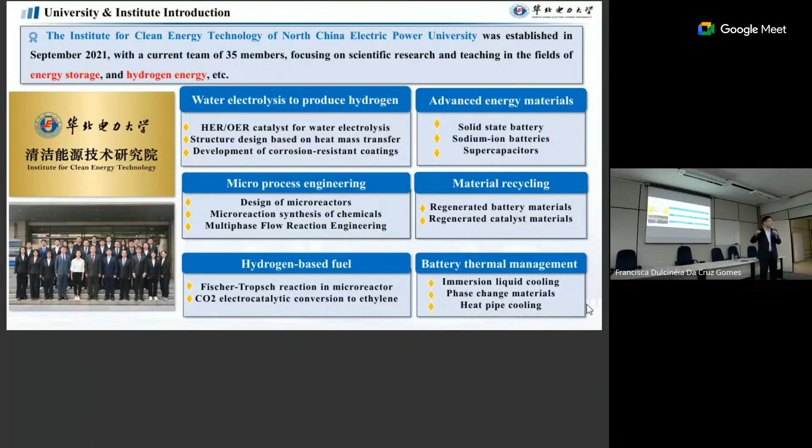And also for the last one - this development is still basic research - but for the whole managed thermal energy storage system, the most important thing is battery thermal management to keep it safe. So we developed some immersion cooling systems, phase change materials, heat pipe cooling to keep the temperature of the whole system stable. That's basically the research direction in my institute.

This is a group member in my group.

Let me make a brief introduction about myself, because I did my master's degree in France, University of Savoie. Then I worked at University of Lorraine in France, at the Institut National Polytechnique de Lorraine - the ENSIC engineering school for chemical engineering. When I finished there, I went to University of Gand and University of Rouen for a joint program for my PhD.

When I finished, I got a Marie Curie fellowship, and with this fellowship I went to University of Limerick in Ireland. I worked there a few months, then for the second part I came back to Karlsruhe Institute of Technology in Germany, where I stayed for one more year. After that I came back to INSA Toulouse, Institut National des Sciences Appliquées de Toulouse.

There I finished this Marie Curie fellowship. When I finished, I came back again to Karlsruhe Institute of Technology, where I stayed for a few years. In 2017, I came back to China and joined this university. I founded this institute in 2021, and last year, 2024, I founded a new department, called the Department of Energy Chemistry.

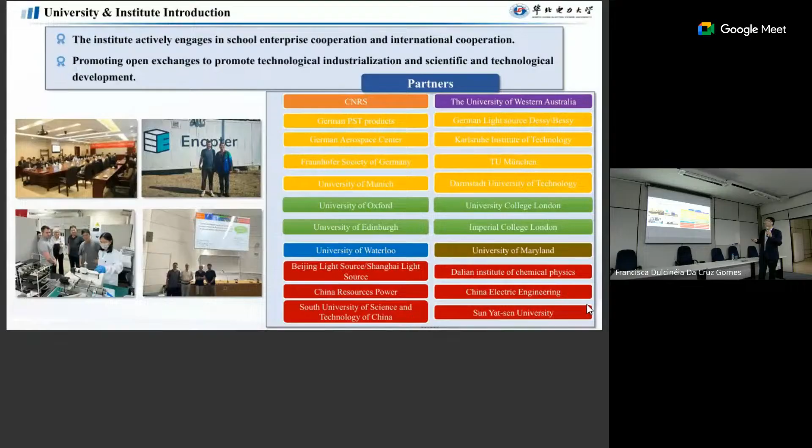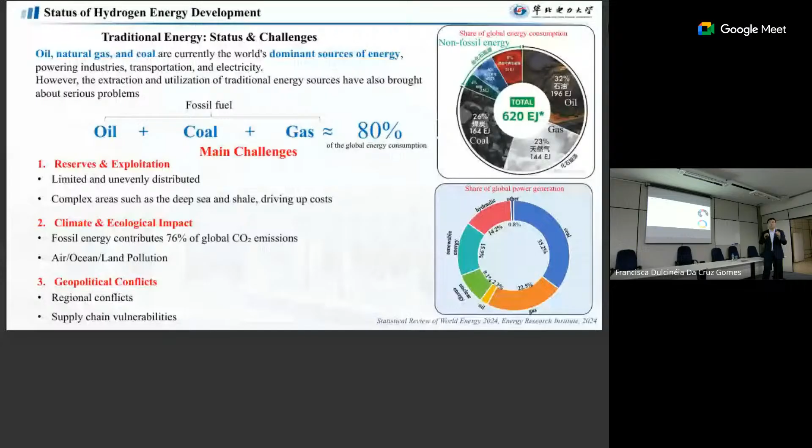So in China we have a lot of coal but are scarce in oil and gas. But for example, in 2023, if we check energy consumption in China, we see that non-fossil energy is only 16%.

You may read in the news that China has more installed power, but in reality a lot of that power is not being used. Because we installed this renewable energy power, but the grid doesn't like this kind of energy, so they don't use it. So in reality we have only 16% from non-fossil energy.

But of this, we have hydropower and also nuclear power. For PV and wind energy, we have about 4%. So it's a really small percentage.

Over the years, we believe wind energy and solar energy consumption in China will increase much more. For example, by September 2024, the total installed capacity is more than 1,000 gigawatts. The breakdown: hydropower 430, wind power 480, solar power 770.

But in China, we've almost used up our hydropower potential, we've finished developing it. So future development will be realized through these other sources.

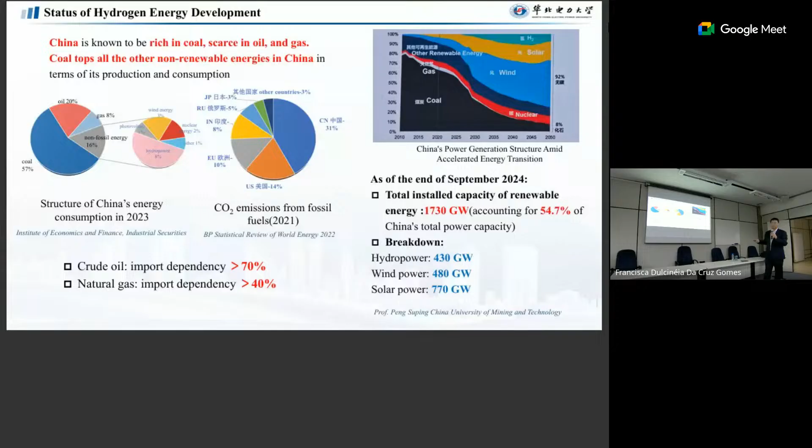Also, China has a commitment for climate change. We try to get peak carbon emission before 2030 and achieve carbon neutrality before 2060. Our president announced it before the world, so we have to finish it.

According to this report, 80% of the reduction in carbon emission will come from new energy in the energy transition, like PV systems and wind energy, and 20% will come from energy saving over existing processes.

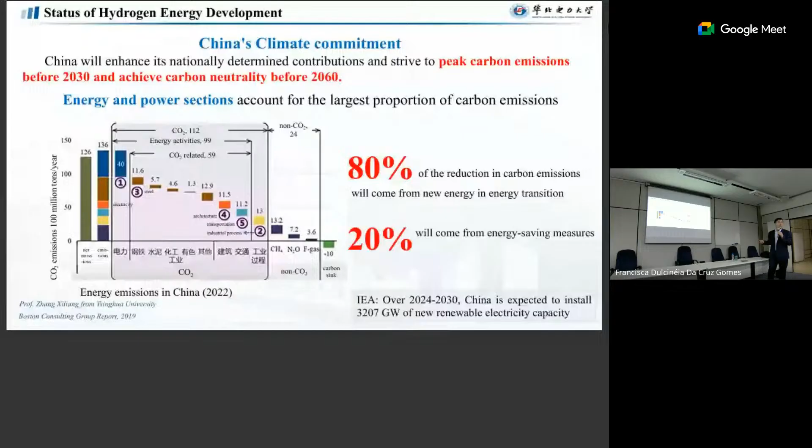Then we go to hydrogen energy, because hydrogen energy in China is now a very hot topic, with advantages like low carbon emission and high efficiency. Before, China also produced a lot of hydrogen, but it was mainly used as chemicals and raw materials, because we have heavy industry and chemical industry.

From now on, hydrogen as an energy carrier will become more important. So as an energy carrier, its percentage will increase, and as a raw material it will go down. That's the trend in China.

So hydrogen, why we use hydrogen in the electric power system, is because hydrogen is a good energy storage media. But we have different energy storage methods, for example batteries and compressed air. We have different sections in China. But why do we use hydrogen?

For example, when we compare to battery, at the moment in China most of our energy storage is with batteries. But why don't we use batteries? Because the energy density of battery is too low. For example, when we increase the capacity, we need to develop a lot of batteries. I think it's not a sustainable way for using battery for energy storage.

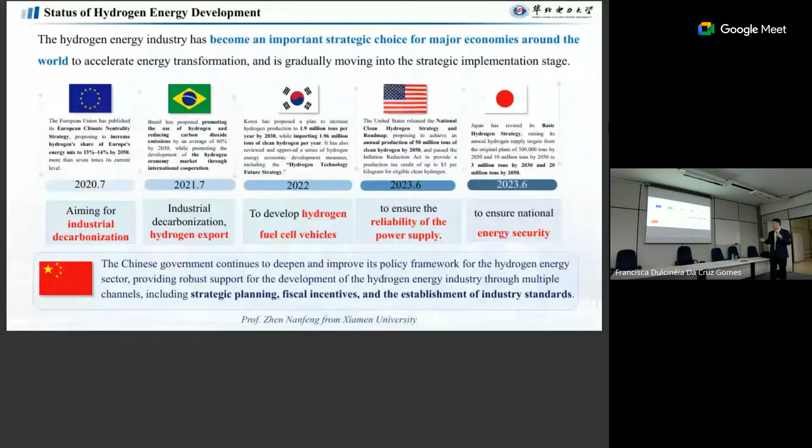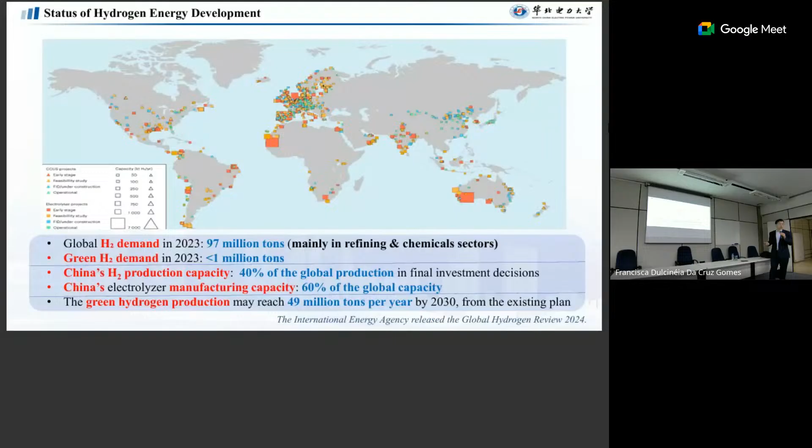Then we come to this hydrogen demand. For example, in 2023, the world had 97 million tons of hydrogen demand, but only less than 1 million tons by green hydrogen. China nowadays has hydrogen production capacity of 40% of global production, and for electrolyzer manufacturing capacity, we represent 60% of global capacity. That's really high. We can expect by 2030, green hydrogen production can reach 49 million tons per year.

According to the IEA report, global hydrogen demand will reach 520 million tons by 2050. If China accounts for 30%, that means 150 million tons. Among them, 109 million tons of hydrogen will be used for power generation. That means this will be a revolution for Chinese energy structures.

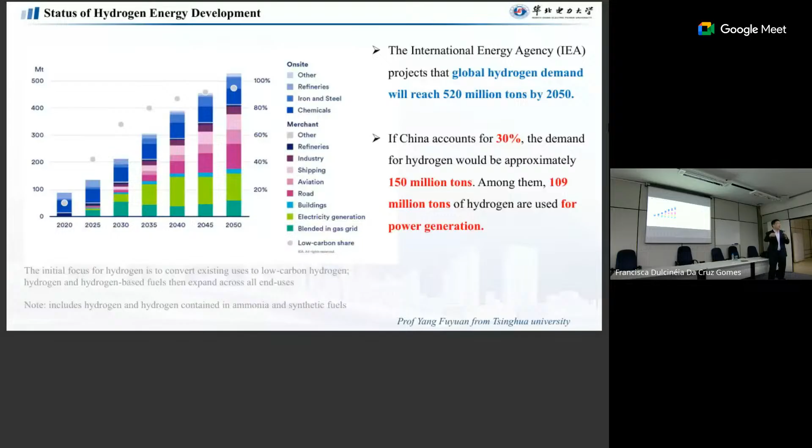For the complete hydrogen energy development, at the moment it's still in the initial stage and demonstration. For example, for production, we have water electrolysis for hydrogen production. We try to develop this in our institute, and I think also many universities in the world. We also have hydrogen production from fossil fuels and chemical raw materials, etc. At the moment, most of the production of hydrogen comes from fossil fuels, not from water electrolysis.

Then we have a storage and transportation problem. For example, nowadays we can store it as liquid hydrogen, but the problem is if you want to liquefy hydrogen, besides pressure you need to go to low temperature, which makes things more complicated. We can also use high pressure storage, which is very common in China at the moment, and also solid state storage and other methods. I didn't list transport here.

For me, most interesting is the utilization. For example, industry use as before, as raw materials for chemicals, and also for electricity generation. For electricity generation we have basically two parts: fuel cells, and combustion. We can combust only hydrogen, or put hydrogen inside something else. But here we also have a problem because hydrogen can create embrittlement of metals.

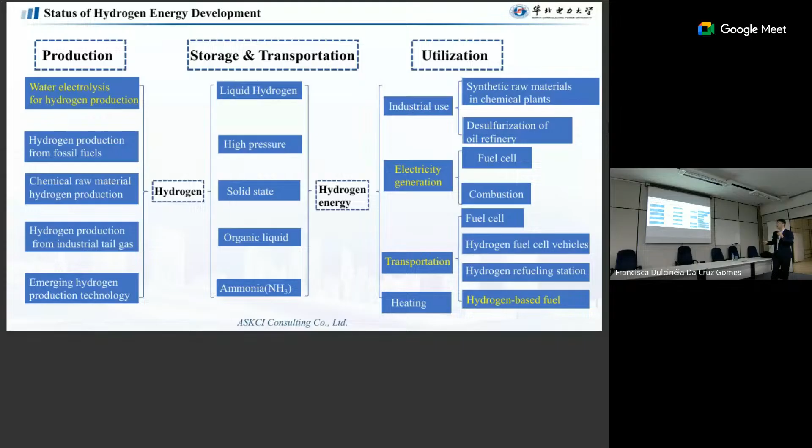In the whole world, the hydrogen energy industry is still in the initial and demonstration stage, not really industrialized. For example, at the moment, electrolysis of water only presents a small part; most comes from coal, natural gas, and byproducts. Coal-based hydrogen production, natural gas-based hydrogen production, and industrial byproducts represent 80%, 15%, or 5% respectively. That means from water electrolyzer, almost zero. The percentage is still too low.

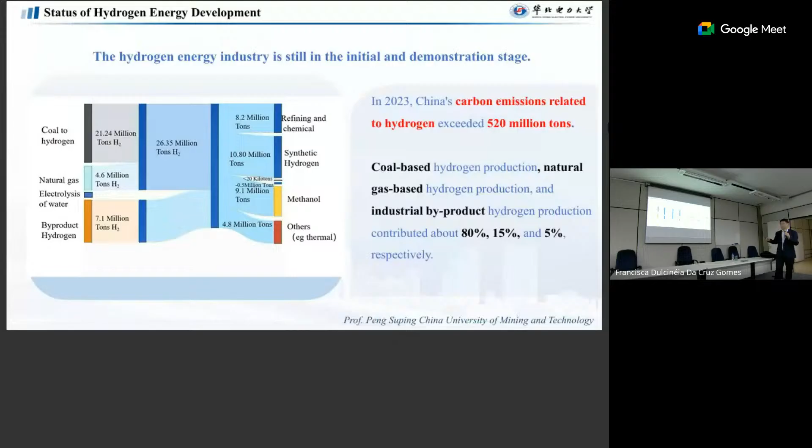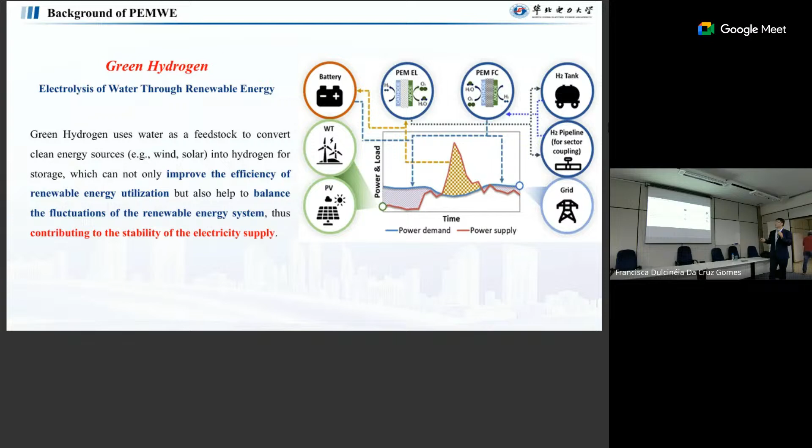For the next part, I will try to go to the water electrolyzer section. Green hydrogen means when we produce hydrogen from, for example, water electrolyzers, also from biomass. But in our group, we mostly use water electrolyzers.

For water electrolyzers, mainly at the moment we have 4 different kinds. The first one is alkaline. The alkaline system is the most mature technology at the moment. In my opinion, this technology is very good and also has a long history. I remember hearing that this technology was originally developed for submarines, because in the enclosed space of a submarine, they tried to produce oxygen for the humans. Then they used this technology nowadays for hydrogen production, and it also works very well. The cost is cheap because in the alkaline environment we can use cheap catalysts, and the temperature of 60 to 90 degrees is also okay. But we have a problem: electric load.

Electrical load is really limited. The reason is because in this system we use porous separators, so we have a diaphragm in the system, and this diaphragm is porous. Then we have a problem because we have hydrogen on this side, oxygen on this side. The hydrogen will try to diffuse through the pores to the oxygen part, and then we easily get the mix. That's why this technology cannot produce real high purity hydrogen because of these reasons.

Also, if we have a very good electric load, for example, with good electrocatalytic reactions for producing hydrogen and oxygen, if the speed is very fast, then the diffusion rate compared to the reaction rate is very slow. That means this diffusion rate is constant. For example, if you have a high rate of production of oxygen, you have a small amount of hydrogen getting inside, it is diluted, so it is very safe.

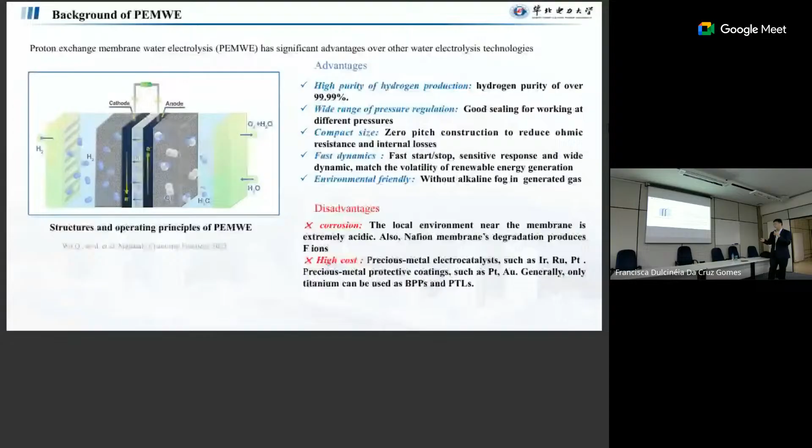The AEM, the problem is the durability, as I said just now. Efficiency-wise, basically because AEM is an alkaline environment, they can use cheaper catalysts. But in reality at the moment, they are not as cheap as we think.

Also, because this membrane's conduction - for example, as a proton exchange membrane, the conductivity is quite good - but for this membrane, the conductivity for OH is not as good as the proton exchange membrane. So here we have a higher ohmic resistance.

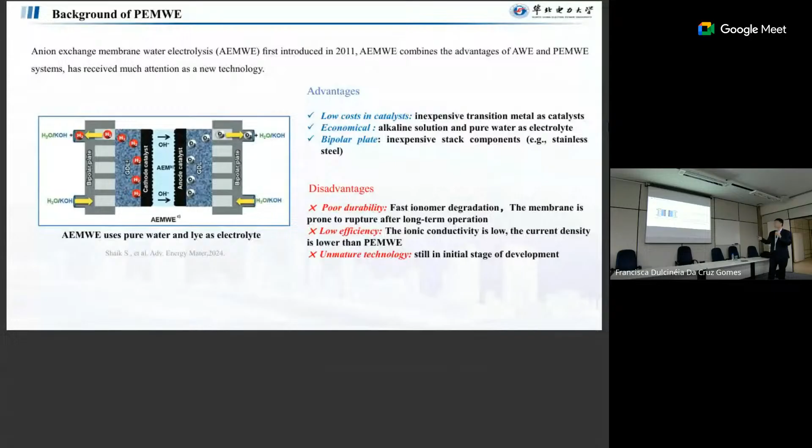But the structure, they are really similar. Okay, for SOEC, as I said, the only issue is high temperature and safety issues.

Then we go - my focus is on the PEM system. With the PEM system at the moment, I will try to go one by one. For example, first we talk about the catalyst.

For the catalyst, a lot of researchers in the world are developing it, but in the end, they found that at the moment the best is iridium for the anode side catalyst, for example for the oxygen OER reaction. And for HER, they use platinum with carbon materials. This is more or less considered standard today.

But how to develop this further? They try to get high activation, good durability, low cost. Based on this material, people are doing a lot of research.

For example, the first one is trying to develop this through size optimization. For example, we can reduce the size of the catalyst and get a better effect. That's something someone is working on.

And also, we try to develop structure design. For example, we can change the electrode structures, and also treat the surface wettability. We can find good results.

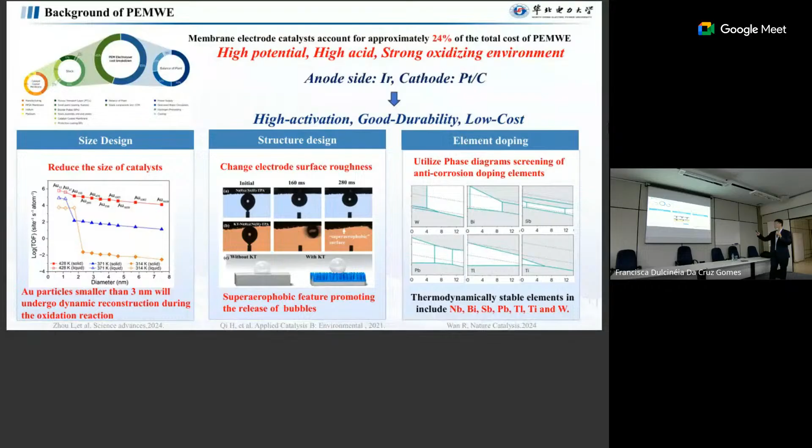And the last one is trying to make metal dopings - with other elements doping into the iridium. They get a good result and reduce the application amount of iridium needed.

The next part is the membrane. For the membrane, at the moment, people still use Nafion from DuPont. This Nafion has for a long time been regarded as the best membrane material for fuel cells, and nowadays we also use this for water electrolyzer systems.

I've checked a lot of publications. Most of the people working on Nafion is for fuel cells. For water electrolyzers, in recent years it's increasing, but still less than for fuel cells.

But for myself, I believe they have a difference. Even the same membrane, when used for fuel cells and for electrolyzers, they are very different. The reason is, for example, for fuel cells we have the oxygen phase and hydrogen phase to produce water.

And before running, we need to humidify the hydrogen to put the vapor phase into the hydrogen. That means the reaction is more in the gas phase.

We use a little bit of water vapor, but for the electrolyzers, we use liquid water. The whole system is a bit different because the liquid water is a continuous phase, and the bubbles are a dispersed phase. It's different. And because of this, we have what we call Schroeder's paradox.

Normally we believe when the relative humidity equals 1, we have the same swelling rate as liquid water. From thermodynamics, it's supposed to be the same. But in reality, we've done a lot of tests and they are quite different. For liquid water, we get a much higher swelling rate than RH equal to 100. People believe this may be due to the history of the thermodynamics, but anyway, they are very different. This makes the membrane's own swelling rate very different, so in the end we have a different behavior for this part.

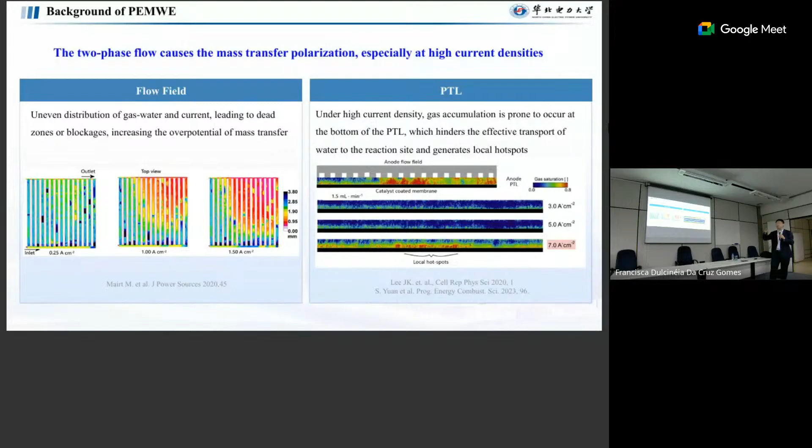For the catalyst layer, normally we have pore size about a few hundred nanometers to a few microns. But for the PTL, we have about 50 microns. For the channels, we have roughly 1 millimeter - in total about 1 millimeter high. So inside, we have different sizes of transport. It's very difficult to meet all the requirements for the structures.

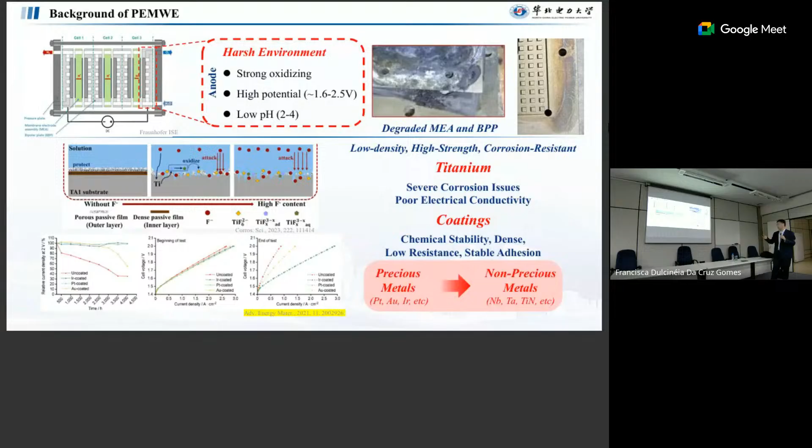The second thing is to use cheaper coatings, because normally at the moment people use platinum, gold, iridium, and we try to replace them with niobium, tantalum, and titanium nitride, for example. So that's another method to reduce the cost.

Because even the PTL itself, you cannot identify if it's good for mass transport or not, since it needs to work together with the channel system. When they're compatible, then it's good.

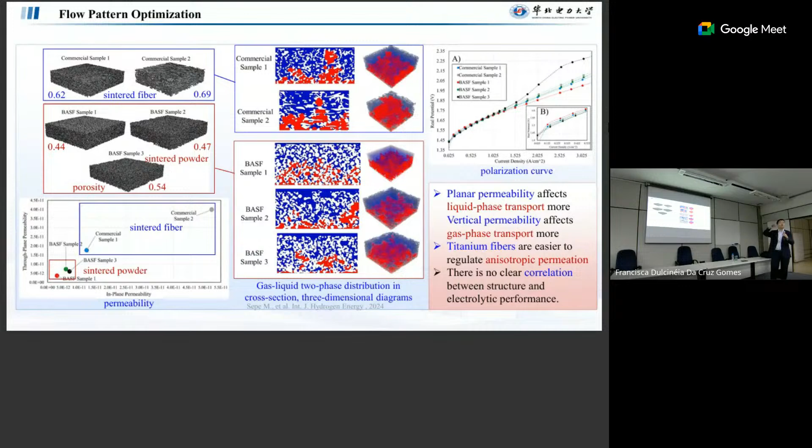The good thing here is when we use this fiber system, we can tune finally the in-plane transport and the through-plane transport by ourselves. That's also a good concept from the paper.

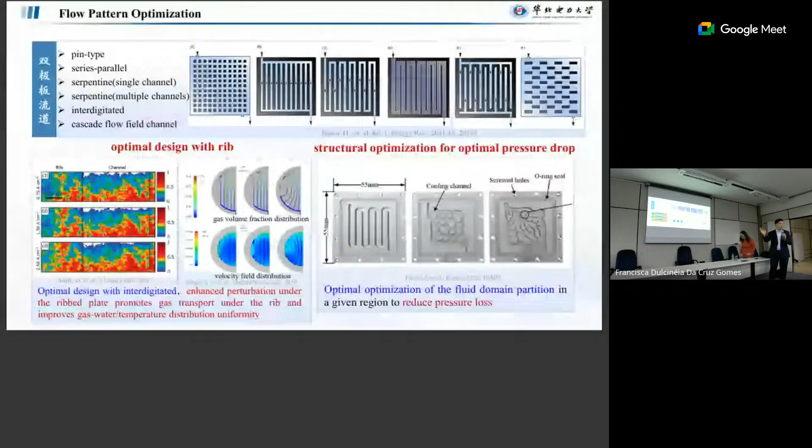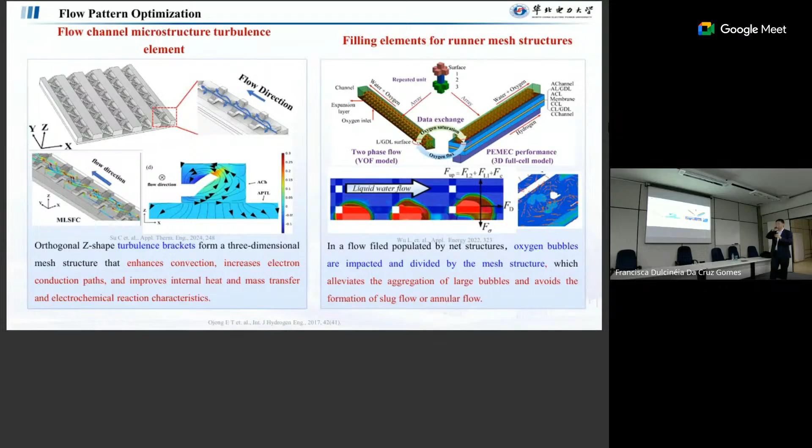Yeah, also we have some good results here, I'll go through faster. In this paper, they put some elements to try to guide the bubble, how to go out. In this system, they try to separate the bubble to avoid forming a slug flow.

And the last work here, in my opinion, they did very good work. This is from the Fraunhofer Institute in Germany. People always think about how to develop channels, but in the end they did one test: this one with channels, the other one with no channels, only different layers. In this system, they have no channels.

But in the end, they found very good results. For example, for the bubble resistance or the overpotential, this one is not as good as the other, but for the rest they are all similar. For the bubble resistance, if we have over 3 amperes per square centimeter, you have an evident difference, but at low current it doesn't matter. That means if we want to reduce the cost, we don't need the channels—we just put different layers and the plate, and it works for low current density. I think this work is brilliant.

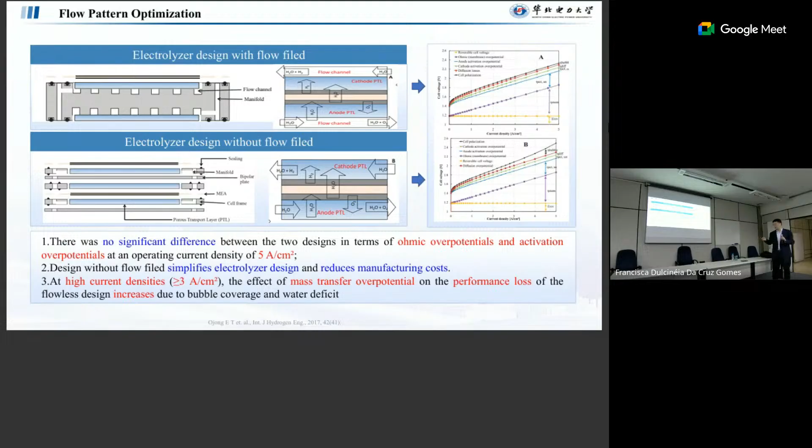Yes, this is something we developed in our group. Yeah, I'll go fast here.

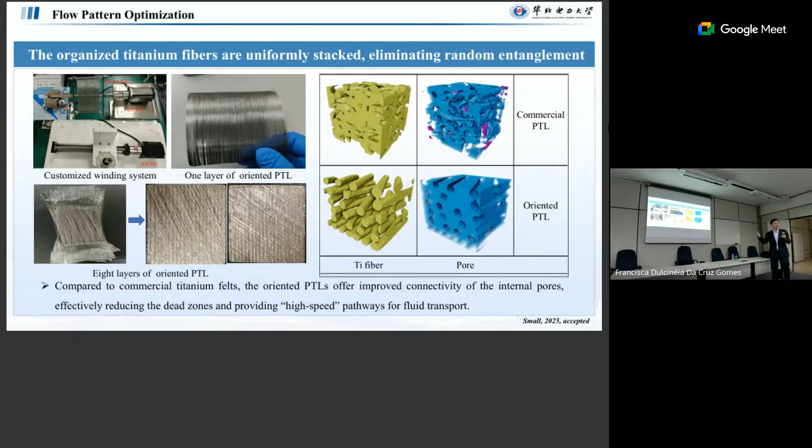Here's another one, we try to develop the PTL with a multi-angle design. For example, this is the commercialized system—here you have a lot of dead zones, the water cannot get in or out, and they trap oxygen inside. Here we have this structured design, and we get very good results in the end, because the water and oxygen can go up and all the way out without a bottleneck. That's why we get a good result.

Yeah, I'll go then. The last topic is about the coating. We try to replace the gold and platinum with niobium, tantalum, and titanium nitride. I'll go fast here. First we developed this HEA system—a high entropy alloy system.

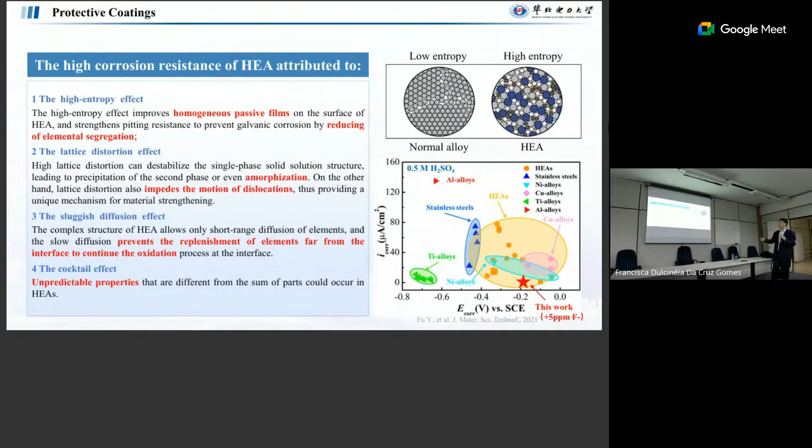With our work, we can get a good potential range at low current density, using a technique called magnetron sputtering. In our lab, we have a lab-scale test for smaller samples, and also with our collaboration companies we have a pilot-scale test—we've already industrialized this. In the CAS in Shenzhen, our collaborators have very big chambers, almost one meter wide, for this sputtering system to cover the surface.

Yes, there are some results, I'll go fast. In the end we have a good effect—a high entropy effect that dominates the formation of an amorphous structure, and these amorphous structures can resist corrosion.

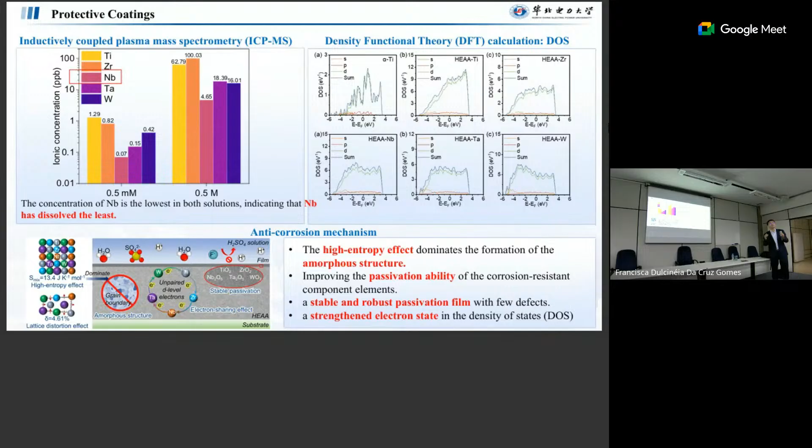Another one we developed is electrophoretic deposition, the EPD technology. This is not a new technology, people have used it for a long time, but the problem is the coating produced by this technique is normally not stable on the surface. We optimized this technique and got very stable coating layers on the surface. Here we use ITO—normally indium is also an expensive metal, but the good thing is we take this ITO from PV panels, which is waste for us, and we reuse that waste in the system.

Because we use this system, we can do it in the beaker for lab scale. But in the end, for industrialized applications, we can use a big container. That means we don't have problems over the space. We can make big structures, anything, no problem.

For example, for PTL, we have inner structures. If we use sputtering, it's difficult to cover the inner surface. But if we use this technology, we can cover the inner surface, no problem. So that's the second technology we did, and we got good results.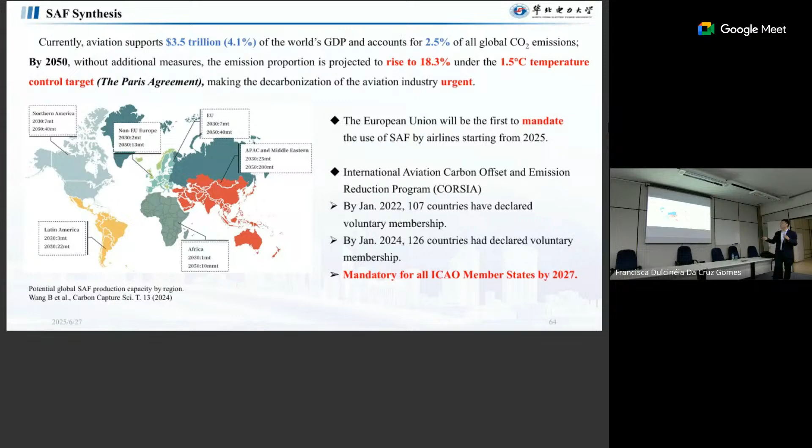Because for this SAF system, normally people produce it with FT, Fischer-Tropsch reactions, but this is a highly exothermic reaction. That means normally people working on the system need to dilute the catalyst, otherwise we will have too much heat. This can damage the catalyst and also the system. That's why we try to reduce the kinetics.

But if we use microreactors, we have the possibility of avoiding these diluters. So we have really high kinetics and also very good temperature control for the system. That's what we are working on.

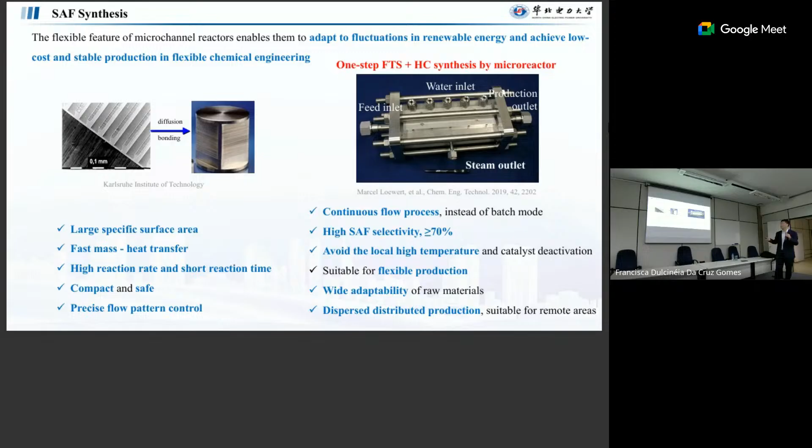This system was developed at Karlsruhe Institute of Technology, and this institute was the first in the world to invent these microreactors. Dr. Sun worked at the institute, almost the same time as me. At the moment, he's also working in my group.

The last slide is coming from the Shuangya SAF project. They produce 100,000 tons of SAF per year. At the moment, I think this is the largest in China, maybe the largest in the world, using this FT process. Last year they just started, and this is funded by the China Power Engineering Consulting Group.

Part-time, I also work in this group. We have a research center over here. So now we try to build some systems for this big project.

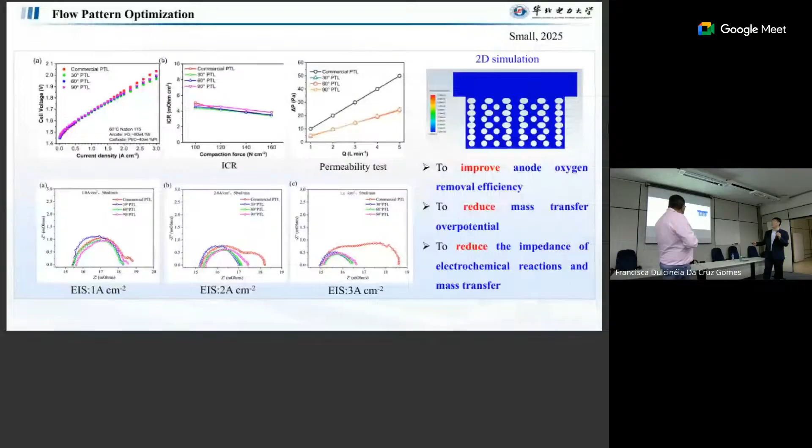By 2060, it can reach 10 yuan per kilo. I believe maybe not exactly this value, but I'm sure it will be reduced. We can see from the beginning, electric cars in China were also very expensive, so the government had to pay allowance for people who couldn't afford the cars. But nowadays it's market behavior. I think over the years this cost will be reduced. And now he has an electric car here. That's very good, a good choice.

Professor, can you talk about the challenges of using resources like water, because it's a limited resource? Can you tell us about the limit, the water reserves, the amount of water needed to produce hydrogen?

That's a very good question. At the moment, I think we didn't have much time to consider the water, because for us the most important thing is how to use renewable energy, we don't abandon wind energy and everything. But this is a real issue. That's why in China we have some researchers working on electrolysis of seawater. We take it directly from the sea. We already have some demonstrations in China, and I think in future it will work. If we use fresh water, that's true, we have the limitation. But if we use water from the sea, it's not a problem at all.

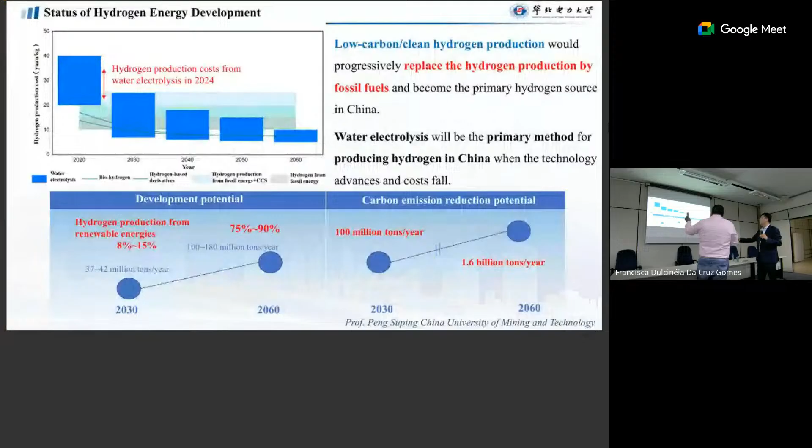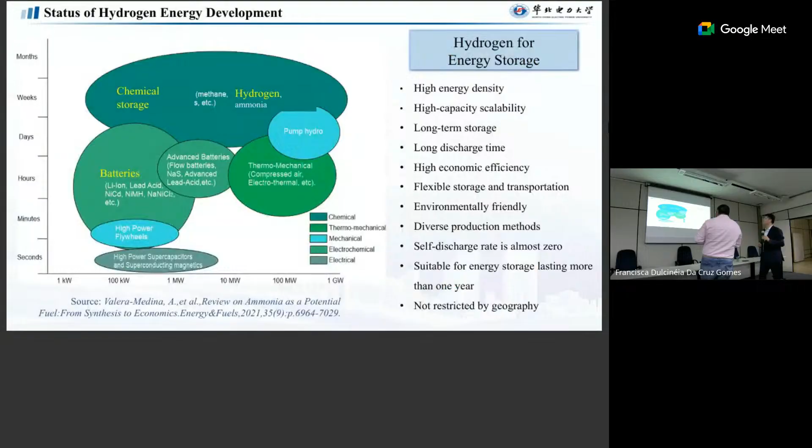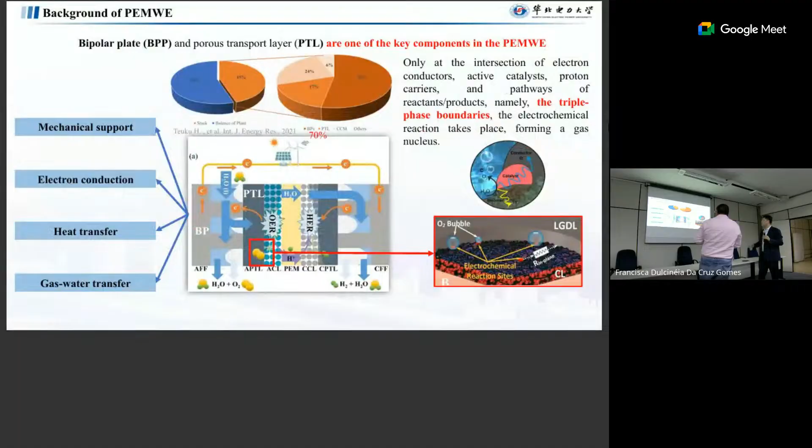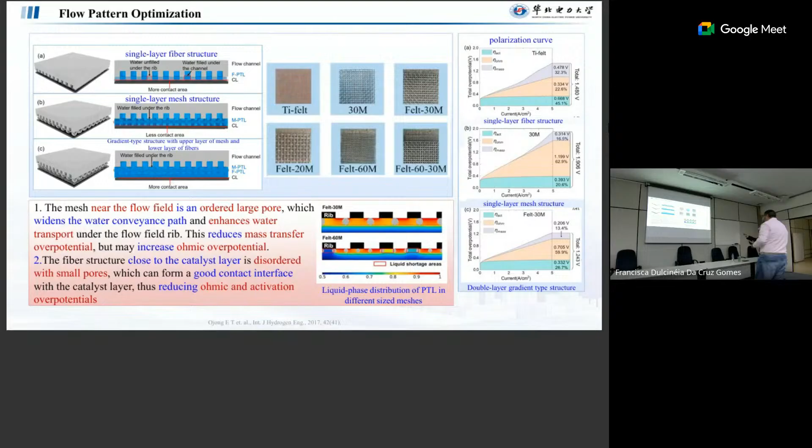Could you show the slides? Which one? The one with lab research, then the prototype, and then industrial. Where is it, to the end? The last one? No, I don't know, I think the end. Yeah, the end, three prototypes. Prototype, okay, yeah, prototype, it was for the coating I think. This one? Yeah, okay, this is the secret.

I think they have three steps: the basic research, then the pilot scale, then the industrial scale. And about your question on fundamental research and applied science - in my group I work on both, basic research and applied technology, because if I only work on the basics, industry will not pay me for anything. So that's why I work on both. In my group the students are also divided into two parts: some work on fundamental research for papers, some work for industry to get more funding.

Professor, there is one question from the online audience about turquoise hydrogen from pyrolysis of methane. He wants to know if you have information about this, if China is also researching and developing this type of technology, from biomethane.

Yes, at the moment we also produce hydrogen by reforming methane. In China it's also a big industry, but the problem for us is that it's not from bio, because in China biomass is not as rich as in Brazil. Here you have a lot of agriculture, so you can collect a lot of biomaterials for producing biomethane or biomethanol to produce hydrogen. In China we're also doing this, but compared to here, we don't have enough biomass. But this technique itself is good, yes. We will also develop this.

Então, o que é que a gente vai ter nessa fazenda? É uma parte da Fazenda Argentina, que vocês podem ver aqui, vai ser do lado ali do Museu de Ciências, na fronteira no final do nosso campus, que faz fronteira com a Fazenda Argentina. A gente vai ter uma área de 10 hectares para fazer esse hub de energia sustentável.

Nessa fazenda agrovoltaica, a gente vai ter 3 áreas: uma com 70% de sombreamento, uma com 30% de sombreamento e uma sem sombreamento. Nós vamos plantar tudo quanto é coisa possível nessas 3 áreas para descobrir que tipo de planta vai bem com sombra de 30%, com sombra de 70%.

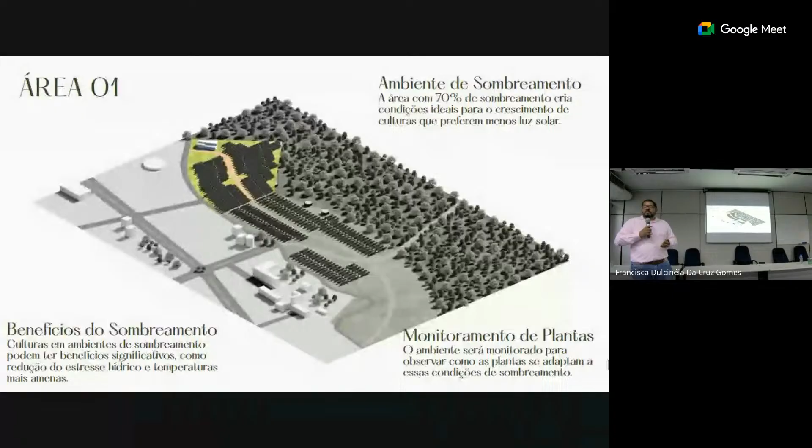Vocês sabem que aqui no Brasil já tem bastante produção em área sombreada, né? Sobra sol, às vezes para a planta isso é ruim. Então dá para fazer essa combinação, só que a gente tem que fazer essa pesquisa para descobrir o que vai bem em cada nível de sombreamento. Por isso que a gente tem esses 3 tipos de área: uma sem sombra para você comparar como a planta se desenvolve em pleno sol e na sombra.

Também a gente vai ter metade da usina com trackers, com painéis móveis, porque se você tem pouco sol, você pode priorizar a planta, deixar aquele sol para a planta e não gerar energia naquele momento. Quando você tem muito sol, você pode priorizar a geração de energia e mandar ainda para a planta a quantidade de luz que ela precisa. Então é metade com trackers, metade sem, para a gente comparar também o efeito disso nas culturas.

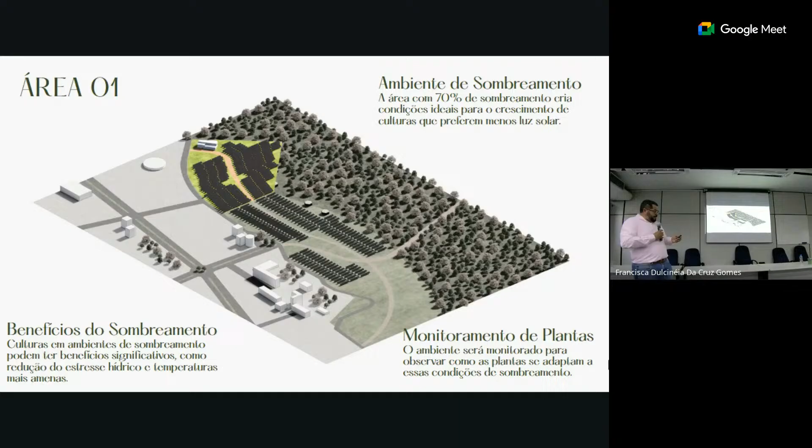Como eu falei, também com coleta de água de chuva. E também aqui é a área com 30% de sombreamento, aqui uma área sem sombreamento. Isso tudo somando 10 hectares.

Ali vocês estão vendo os tanques de armazenamento de água de chuva. 2 milhões de litros de água de chuva a gente vai conseguir captar nessa usina que vai ser de 5 megawatts. Então vai ser possível a gente captar 2 milhões de litros de água de chuva nessa usina, nessa fazenda experimental.

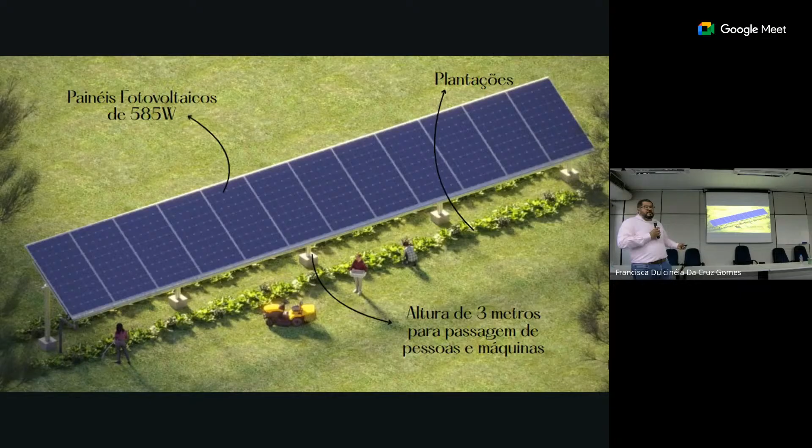Vocês estão vendo também que ela vai ter ali, aqui a área sem sombreamento. Ela vai ser uma fazenda, então, que a gente vai coletar água nos painéis, e ela vai ser equipada também com uma quantidade enorme de sensores, sensores de tudo quanto é coisa. Então vai ser uma fazenda inteligente, 4.0.

Uma indústria 4.0. Então vai ter também IoT, sistemas de sensores para coletar dados no ar, dentro da terra também tem sensores para a gente otimizar a irrigação e a fertilização. Vai ser tudo otimizado. Sistemas de luz complementar também, já que a gente tem um montão de energia durante o dia, a gente vai poder usar a energia para fazer a planta continuar crescendo durante a noite.

Tem plantas que precisam de muitas horas de luz. Então aqui a gente vai ter também a infraestrutura para estudar esse tipo de planta. O uso de sensores para você otimizar toda a irrigação e também a fertilização da fazenda, em todas aquelas áreas, inclusive a área sem sombreamento.

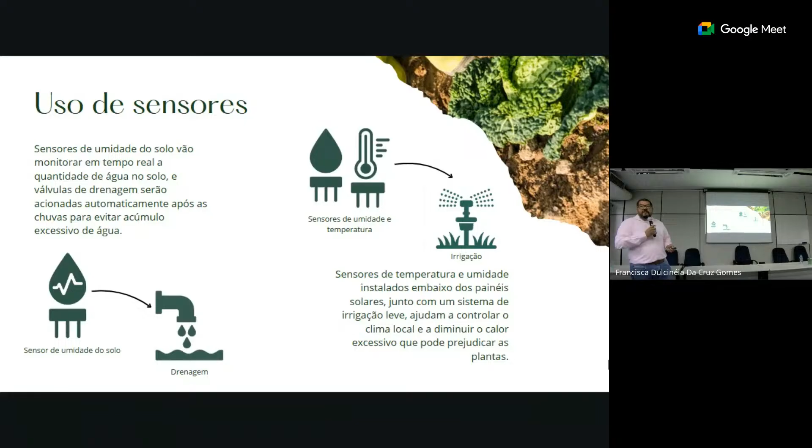Inteligência artificial para otimizar todo esse processo. Então ela vai ser uma fazenda inteligente. Tudo isso vai integrar - eu esqueci de mostrar para vocês - ela vai ter aqui um centro de operações da fazenda inteligente. Tem um predinho ali onde você tem o centro de monitoramento, os servidores que vão ficar rodando inteligência artificial para você conseguir otimizar todo esse processo.

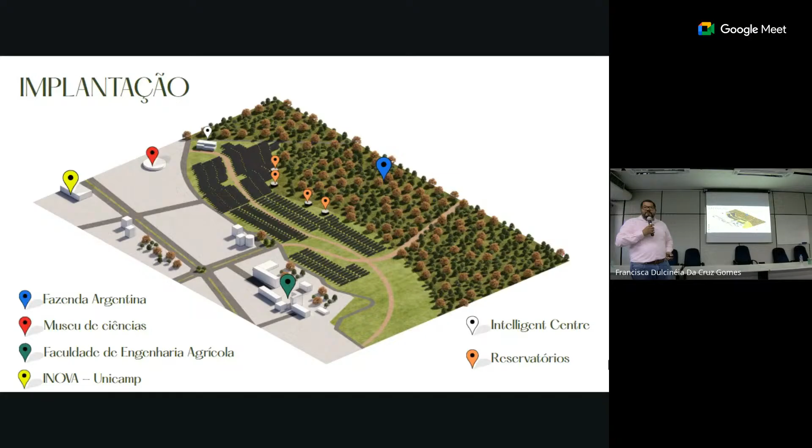Então, a gente já tem um acordo com a Chamano para implantar essa fazenda. No momento, a gente está tentando vencer as nossas velhas dificuldades jurídicas para parcerias público-privadas que a gente tem no Brasil, porque a metade do recurso para essa fazenda experimental é da Unicamp, metade é da Chamano.

Isso aqui vai gerar um espaço de pesquisa para diversas faculdades da Unicamp, por exemplo, na área agrícola, na área de computação, na área de engenharia elétrica, na área de gestão de recursos hídricos. Então vai ser um grande equipamento de pesquisa que a Unicamp vai fazer.

E mais ainda, o nosso combinado aqui com a reitoria, com a Unicamp, é que a metade da energia dessa fazenda vai ser para a gente fazer projetos em outros desafios de transição energética, por exemplo, a produção de hidrogênio verde, a produção de amônia, a produção de SAF. Então a gente vai ter dessa usina energia para futuros projetos, que eu falei que seria aquela fase 2 e a fase 3 que a gente quer fazer. Depois disso, a gente vai ter hidrogênio no campus, então a gente vai poder ter ônibus a hidrogênio também.